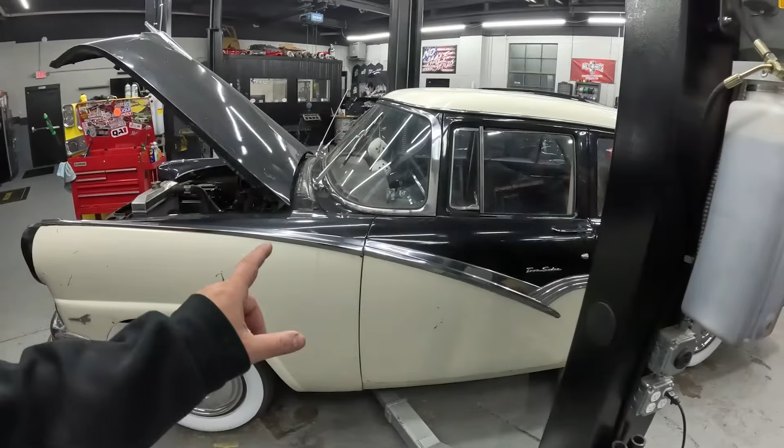So as I was saying outside in the cold, this is a 1956 Ford Fairlane. I believe it's Crown Victoria. It says Town Sedan. I saw a Victoria badge somewhere. I believe they had a 272, a 292, and a 312. What, 292 usually on the Y blocks? Yeah, this one is a 292. They also offered like a 312 for special edition or. This had a 292 in it as well when I got it. Oh yeah, so, with a 3-speed on the tree.

Yeah, you guys know that's Chris's '54 F100. So didn't I have like the same engine then? Didn't these both, pretty much the exact same thing? Oh, like look at these, they're like brother and sister. It's like we're a 50s Ford specialty shop. I know, switching up specialties. You guys will see more on Chris's truck, as I've said that in the last 25 videos.

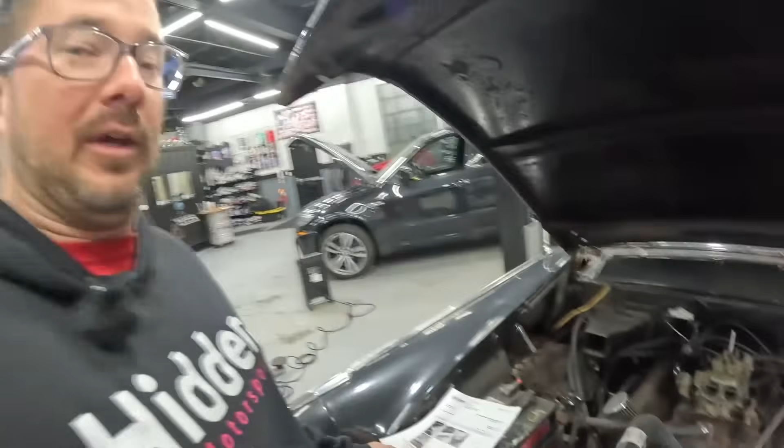We have a lot to do to this car. As we told you outside, we're giving it to my grandpa. He deserves it, he got me into these cars. He's always wanted one, so we're doing it. Vo and Chris is going to be helping on this project.

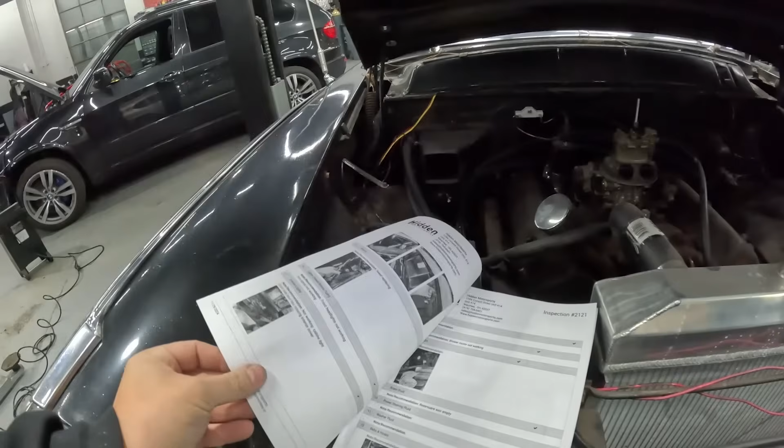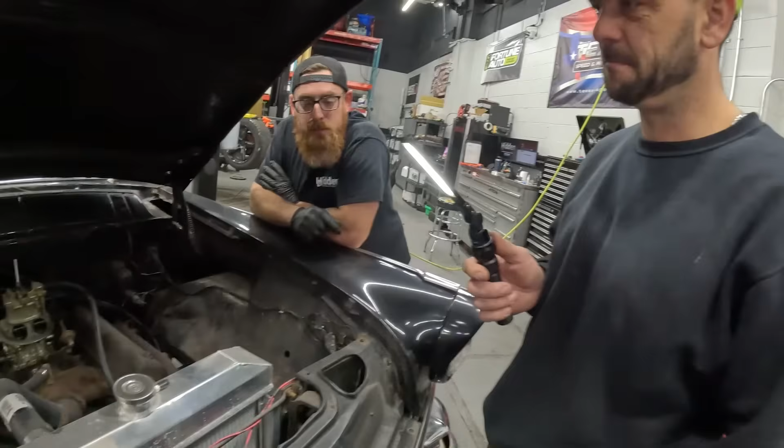What do we got going on? We actually did our full inspection on it like this was a customer car. We need wipers, lights, interior lights. There's no AC. Did the heater work? Probably not, no, heater didn't work. Engine oil was iffy, brake fluid not good. Belts and hoses, not good, because we had the upper radiator hose touching the exhaust. Oh yeah, this one, oh yeah, that's melting to it right now. Yeah, that's not good. Cabin filter, non-existent.

Spark plugs, really bad. Oh yeah, we had to re-gap them because they're basically closed tight when they should be like 70 thousandths or something huge on these. I think it was 65 or 70? 55, maybe 60, something like that. Gosh, so many. Not like .2 on these newer high power stuff we're doing. Battery is fairly new, but it's not charging, so we got a new alternator for that.

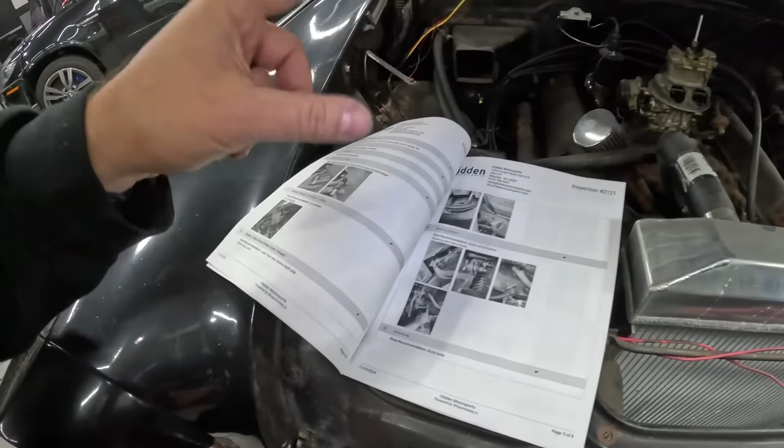All the brakes are leaking, right? Or was it all of them? Or all the drums. Yeah, they're all drums. Gotta go. Yep, drums are gone.

We are doing a front disc brake conversion. Brakes are almost non-existent. I almost crashed it going into the building the first time we pulled it in, and they're all leaking. Steering system also sucks. There's no power steering, it's all manual. And if it's hard for me to turn, I know it's going to be a little hard for my grandpa to turn. That's going out.

Yeah, it comes like a big old brake booster right here. Hopefully not too big, that'll go there. Then power steering, there's like brackets or something, that'll go here. We really don't know what we're doing, but we're going to do it as we go. These old cars are not our specialty.

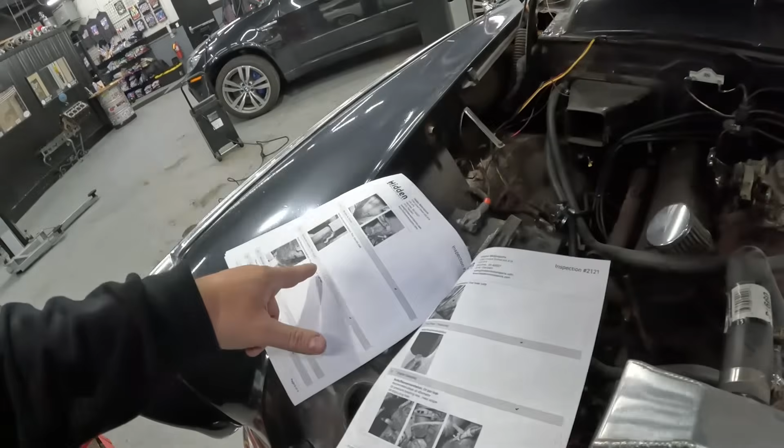What else we got? Oh yep, just getting all new shocks and struts. We're rebuilding the differential. The transmission's leaking, we're redoing that. Fuel lines are rusty and leaking, we're redoing those. Tires, okay.

We got the gaskets. It is pouring oil. Oh wait, oh that worries me. So when we did the inspection, it was pouring transmission oil and engine oil everywhere.

It's not pouring any oil. Does it have oil? But yeah, it was leaking from everywhere, like bad. Yeah, I did not think about that out there. I did not notice any transmission or engine oil. Well, I think we can just send it.

My hope is, I always told him, we talked about it, I was just like hey, if you got one of these, would you keep it stock and cruise it like back in the day? And he's like, hell no, we're going to put a big block and a blower in one if I ever get one. So I really want to hope that he wants to stay on that path. So we'll just get the engine running correctly so we can drive it around, do some things, and then swap it out for a big block and put a blower on it. That would be nasty. Yeah, that really would.

Also, Holley sent us a Sniper EFI 2 because I don't know carburetors and they suck. I am not a carburetor fan. Screw carburetors.

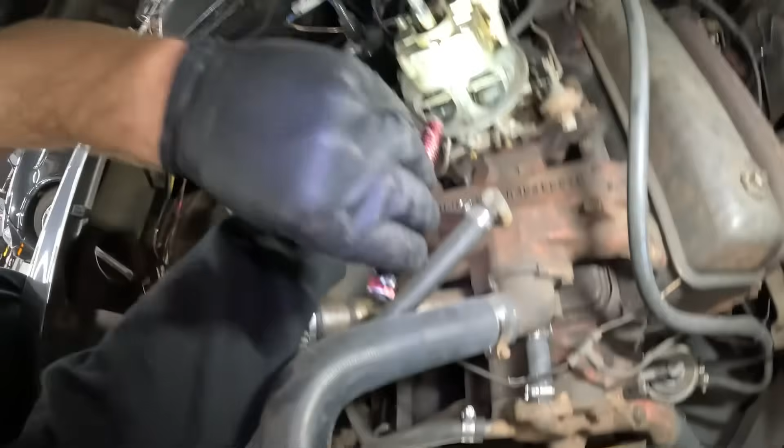My grandpa's probably going to be like, oh yeah, this is a something double barrel jump a Coke can thing. It's pretty sick though, because I think it is an old Holley 2-barrel, I believe. It is a Holley carburetor. Look at that, it is. But the inside is fairly decent.

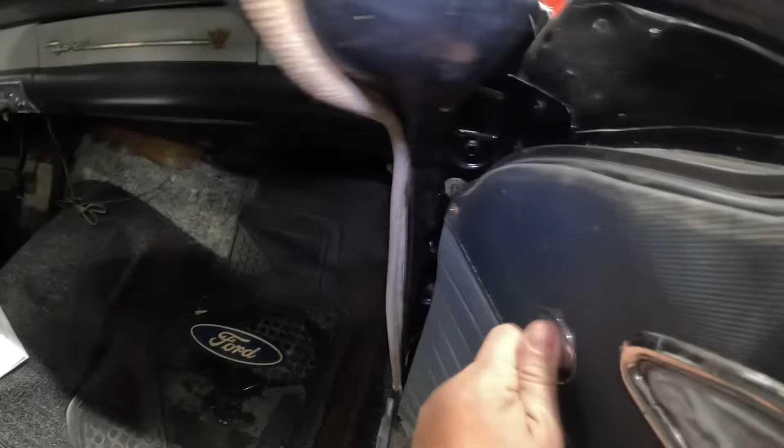We got, which looks like some Ford F-150 floor mats, and overall the interior is clean. It is missing a door panel over there. This one's a little chewed up, the window crank. Yep, no. Nope, crank's not working. That side doesn't have a crank.

That's a big back seat. Real big back seat, needs some love. Probably nice. Yeah, it's not. Oh no, not nice and secured. Okay.

Well, we got our work cut out for us. Yeah, we got lots of work. Work cut out for us. That's the word I wanted. I'll get some parts down. We'll get to it, and we'll be ready to start here right now.

It's a Monday morning, we got all parts laid out. All these boxes are packed full. But oh yeah, we got stuff back here too. This is all in the trunk. There's like new glass pieces. There's new, is that a transmission pan? Or oil pan? Yes, oh yeah.

Well, that's cool. We're gonna go and get started on all the boring stuff first. Probably oil pan, transmission pan, differential, and get to it. We gotta get this thing running this week, Chris. ASAP Rocky, buddy. ASAP. Let's get to it.

There it is. Oh my God, that is worse than I remember. Wow. It's kind of like everywhere. All right, that job should be here. Oh yeah, nope. Nope.

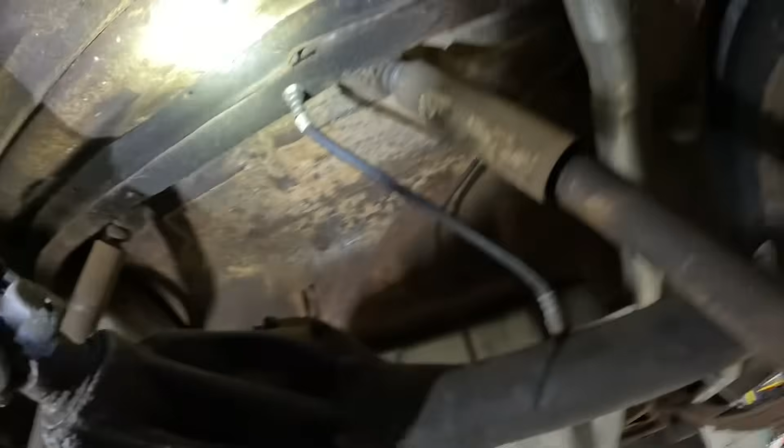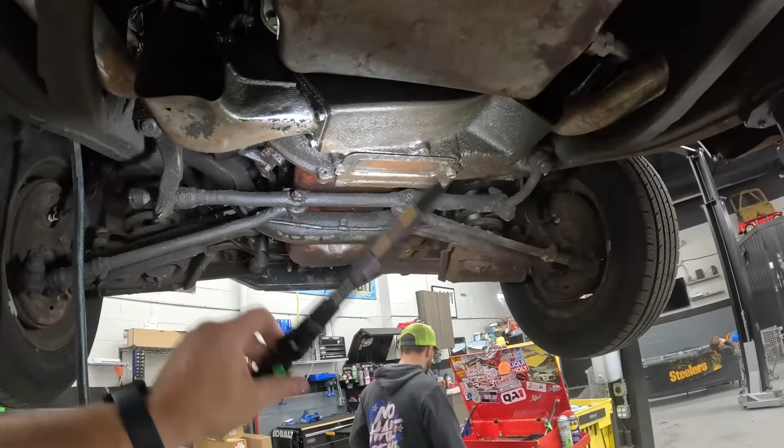As you can see right up here now guys, we got it all put back together with the new seals, with our new custom gasket setup. Custom gaskets, RTV, going up through here, pinion seal. It's all cleaned up, he's got the pan, everything going. We're gonna worry about that stuff in the future, possibly.

We are moving right along here. We are now going to work on the front end. So our friends over at MP Brakes hooked us up. When I was driving this thing around, I was pushing the brakes down to the floor, they were basically non-existent.

I was like, this is not safe whatsoever. Throw the drums in the trash.

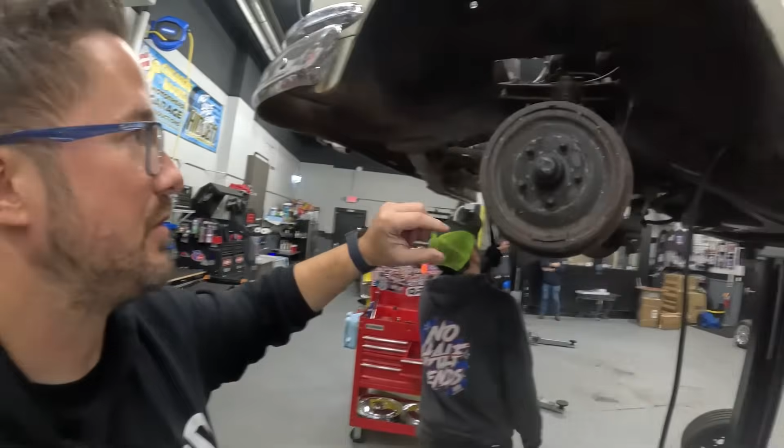Found online, MP Brakes makes a complete kit. It is literally everything you need: front rotors, calipers, pads, bracketry. They even throw in a brake booster setup, lines, literally everything you need. And they do it for so many vehicles to convert all of your old cars with front drums to modern age brake discs. So this is going to be really great.

While we're in here, we are going to try to replace all of these bushings. As you can see, they're blown. Everything is blown. Is there anything good left on this car?

Tires. I worked on this side over here. We got the brackets in, the bearings, all this. I've never actually worked on these, and I got it kind of too tight.

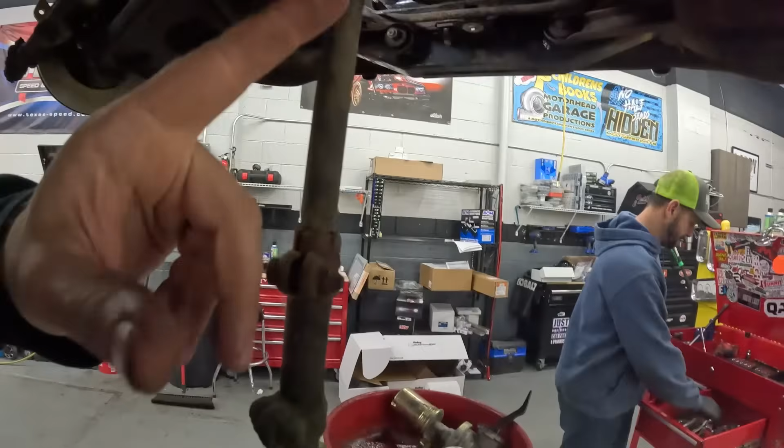Too tight, Vo says. We'll loosen it up. Quarter turn back, but it does take some pressure. He's working on the other side over here. I got new steering pieces for all this that showed up.

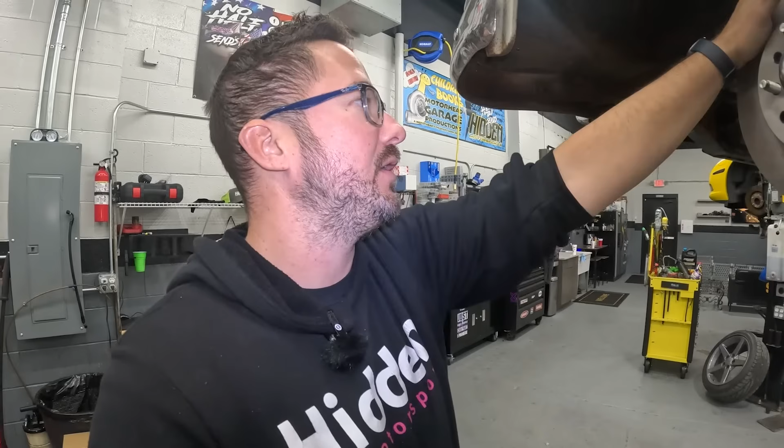It might be day 4, but there is a lot of progress being made. Vo actually has been doing the majority of the work because we're working on it during the day as well. And I got to do all the estimates, all the office work, everything to do with that.

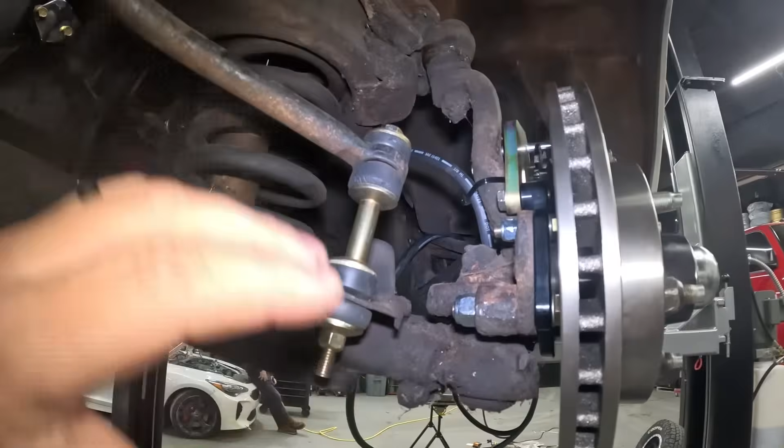But he's got these sway bar bushings in, end links, working on control arm bushings. You can see caliper is in there, all new bearings. It spins. I noticed idler arm was bad, so we got a new one in. There's no play in it. It's going along pretty well.

So here is where we're going to be working on next. I need to get this brake master cylinder out right here, and then I can get down to the steering gearbox down here. And apparently there's a bunch of custom work you got to do, or at least cutting down the steering shaft and things like that. So this is going to be a fun project.

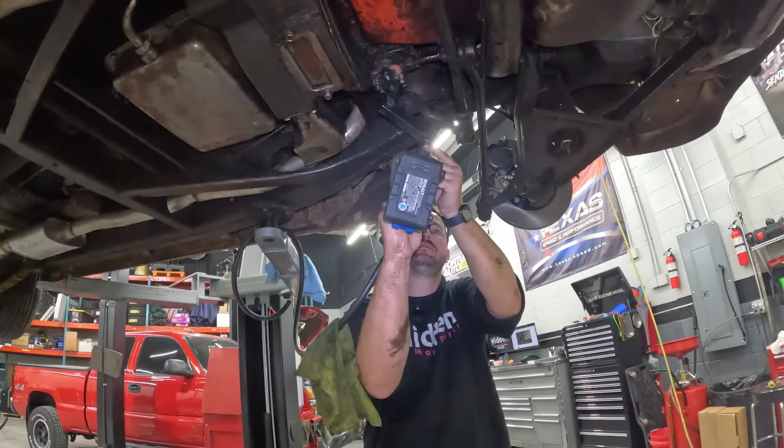Yeah, so I guess I just put this in and ugga it away.

Hey, I did a thing. Woo! I'm so happy. Mother... I'm not so happy anymore. Yep, oil.

So, after that short intermission where we did not yell any cuss words at all, we're good boys, we're good boys.

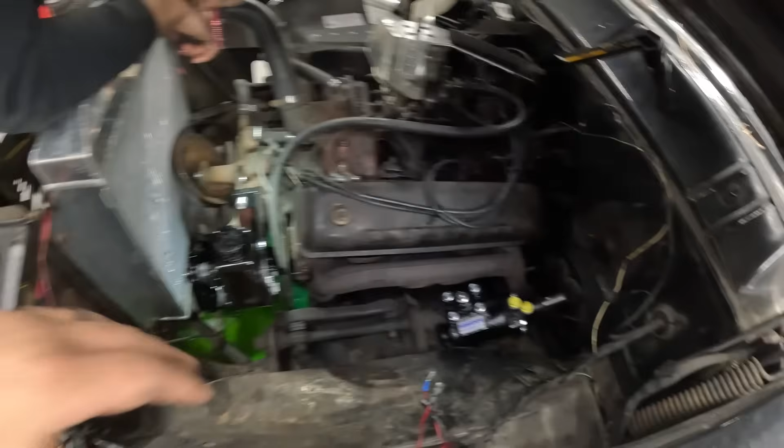We got it out, the steering rack. It's completely out, and then we mounted up the new power steering pump right here. Steering gearbox. Right there is where the power steering lines will go. It is very close to this header. I might wrap it, might send it because we might change it, but I also ordered new engine mounts because I noticed it was sagging a little bit and I could fix it with new engine mounts.

It's got that going. Chris has got the pump right up here, and now we've made the decision to just change the water pump too. Over there, we're gonna need a little modification because the pump, if you can see, it doesn't sit straight on the bracket. Oh, sure doesn't. So the pulley's way off.

We're cocked at an angle here, so we're gonna have to do a little bit of grinding on that, cutting away a little bit. Oh, phone's ringing.

There's another little problem we ran into: the steering wheel. Now, if you see, try to set this up. So I will put the shaft on top of the pump where it goes, and you can see the steering wheel.

That goes there, this goes right here. Now we're driving grandma style down the road.

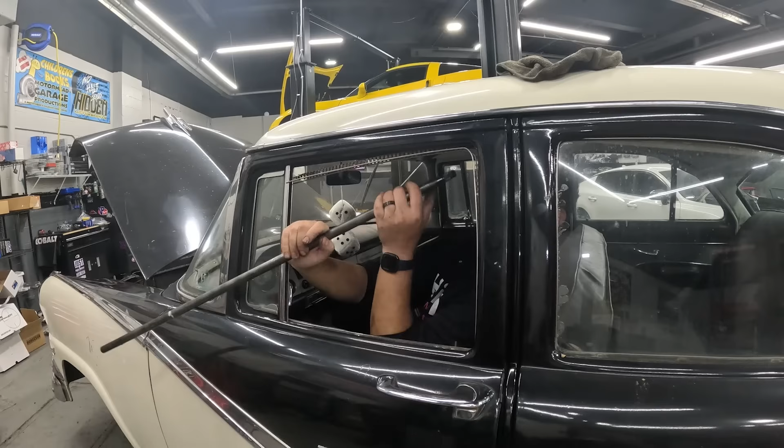So I need to cut some inches off of that. Took me a little mark already. So that's a lot that needs to get cut off. I say a foot, close to a foot. That much, Chris? That's a lot.

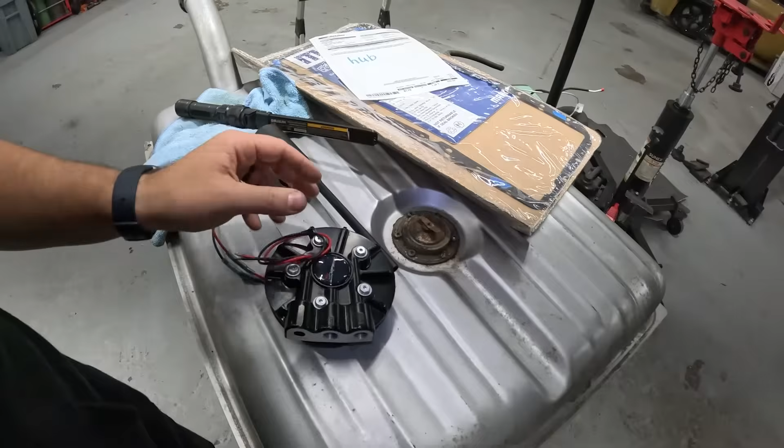So here's the fuel pump setup right here. We cut this out right in our fuel tank. We're gonna put it right here, flatten it down. Comes with all this stuff to hopefully get it a nice, great seal. Comes with all new lines. Then it's going to come with our fuel pump and filter.

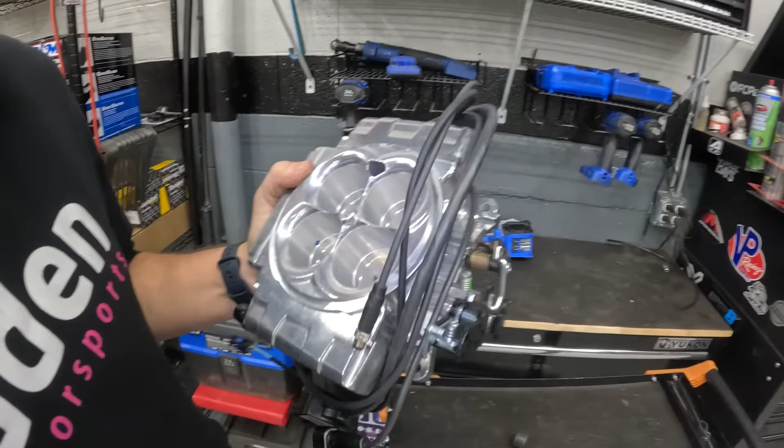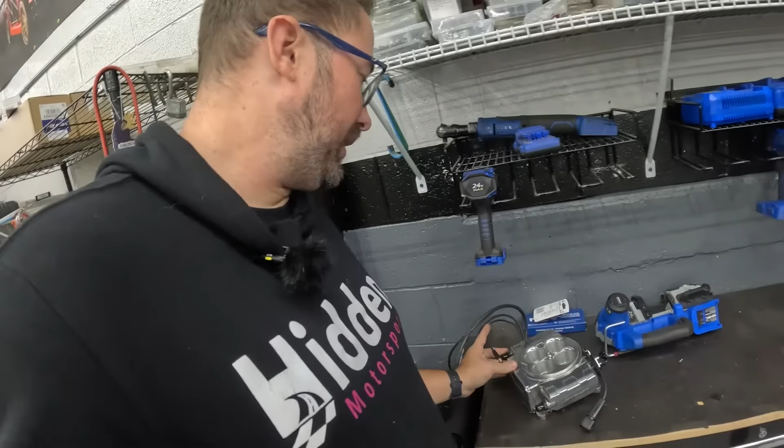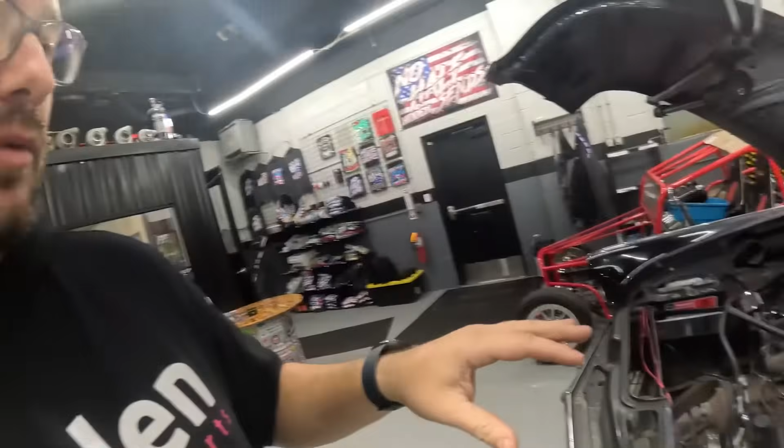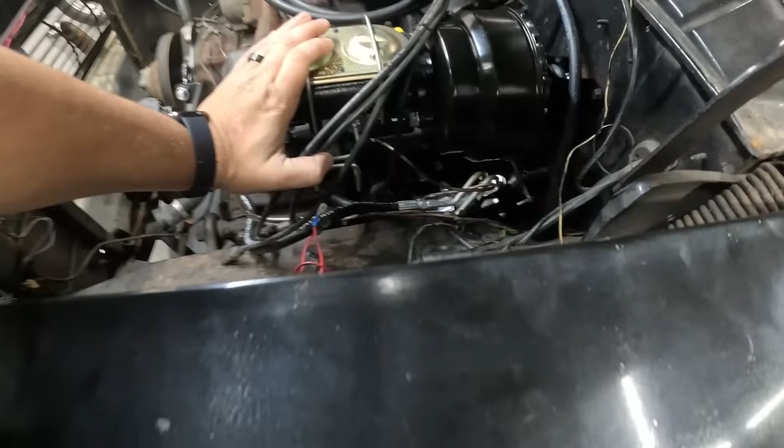I got 3 days to finish this car. You saw we got the brakes done, all new brake lines are in, fuel tank's in. We put in the fuel pump for our sniper. The power steering is done. Had to get a new steering wheel because the old one was crumbling. That was real fun, we had to custom make a steering shaft. See up here, it looks really pretty. We got the new brake booster setup right here, the new power steering setup down here, this new pump. This is just sitting here because we need a few more bolts, but that'll be fine.

Now, this is something I always recommend to everyone to get if you have a carburetor. If you know me, you know I hate carburetors. I just do, don't like them at all. But I understand they were good back in their time. I like fuel injection for everything. So with this Holley Sniper system, you see it basically looks like a carburetor.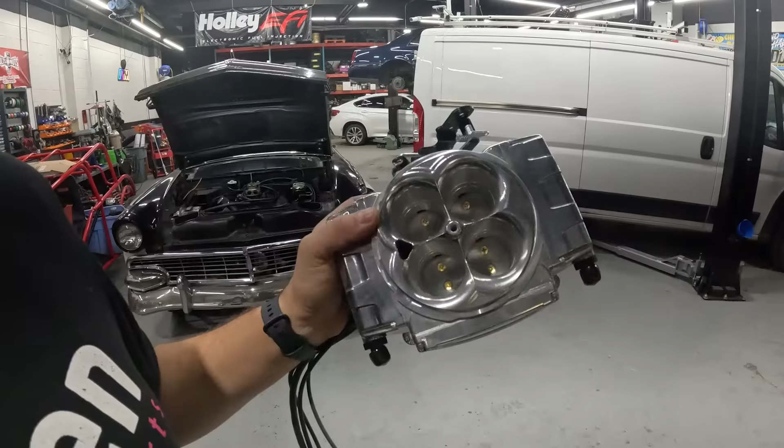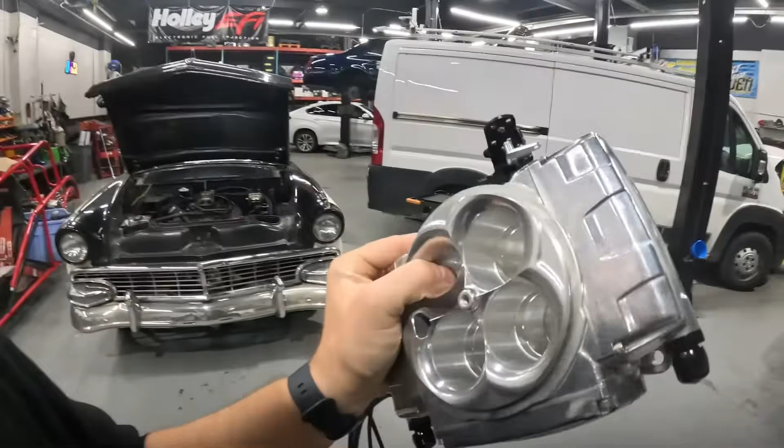It'll trick you, but can't really see. On the inside of these is little computers, or no, right here's the computer to control it all. And inside is fuel injectors, four of them to be precise. And you really just take off your old one, bolt on this one. We got some wiring, and you have a real fuel pump. Other than that, you don't need much else. And it has, you see, an idle air control valve, TPS sensor, everything. So you can have cold starts, that'll be fine. You don't gotta pump the gas, you don't gotta do anything. It'll drive like a modern car.

I've probably installed 5 of these this year for customer cars. And every single time a customer is like, oh my gosh, did you put a cam or something in it? It's so fast now, it's crazy. I'm like, no, welcome to the modern age. It's literally, guys, I'm not even joking, you'll bolt on 50 horsepower and get amazing gas mileage by using these Holley Sniper EFI systems.

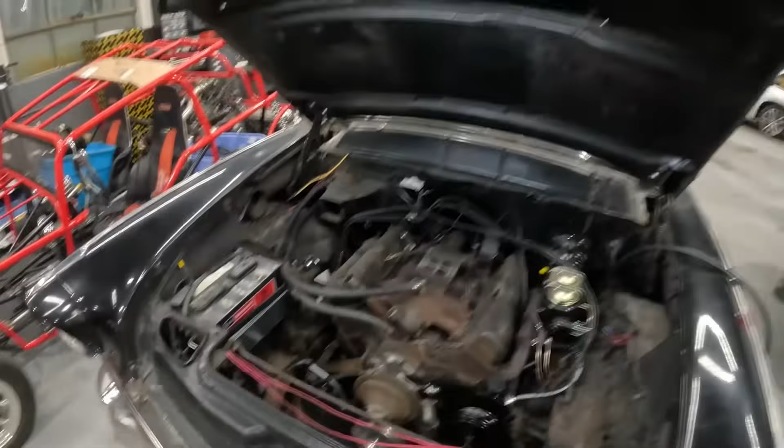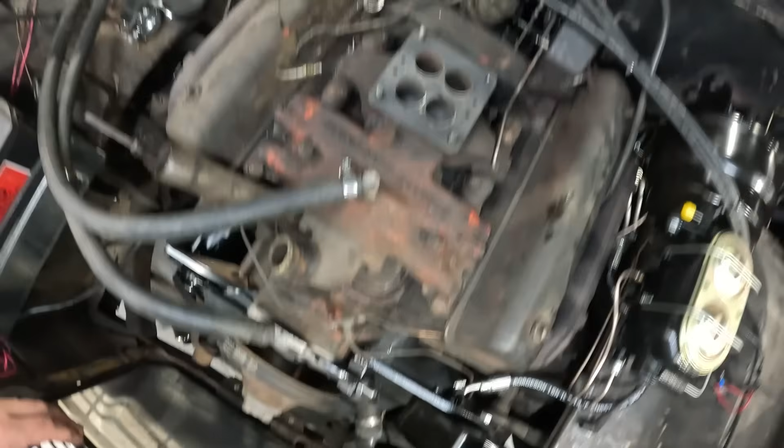All right, we got this carburetor off. These are just little tiny ports. It looks like, I don't even know, down there. Very strange, I am completely new to this style. I haven't done one on an old Ford, it's been like small block Chevys. Believe that's the vacuum thing for advancing timing. I gotta see if I delete that or what do I do, because most of the ones I get already have like a Hyper Spark on them or CD box or something like that. This one's just there, doesn't got much.

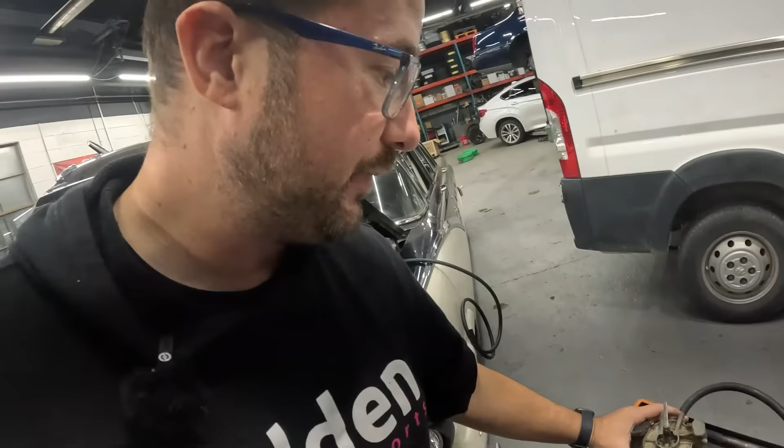But I found something really cool. So this old carburetor, thought was stock, might not be stock, but look at that. That is a Holley carburetor right there, made in Detroit, Michigan. And it's got a whole lot of patents to it. But yeah, that's really cool. I mean, we're taking off a Holley and putting on a Holley.

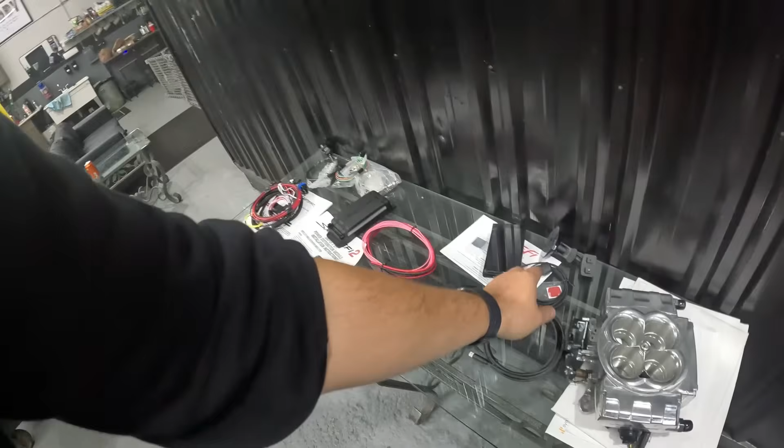Laid out everything right here. Wires, they come with a PDM box. This is, I guess, kind of like a solid state relay a little bit. You can hook up all your fans, fuel pumps, everything to it, and then just plug it into the sniper, and it controls everything, it's really great. And this is actually the first one, it came with a 5-inch touchscreen. Really sweet, so we'll mount that somewhere cool. Monitor your gauges, temps, and it came with this, a GPS speed sensor, so we can have a speedometer.

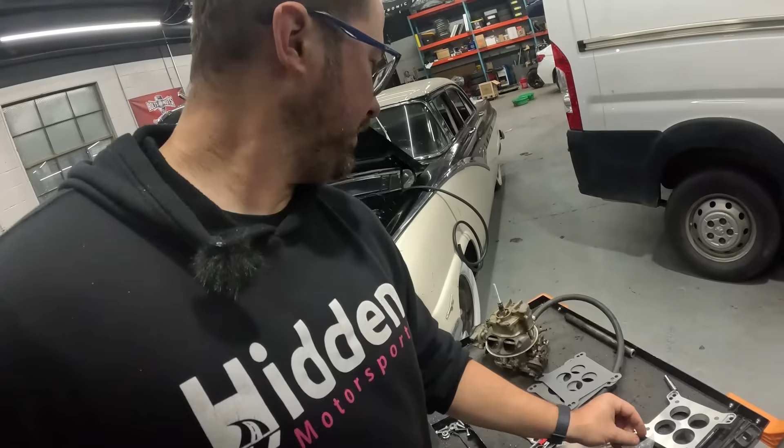Oh yeah, coolant temp sensor, we got to get that wired in. Ooh yeah, need to drill a hole for an O2 sensor, gotta have that. So much fun. And I didn't know if the sniper will bolt up to it correctly, so I did get an adapter plate, which is things and stuff.

It does, well, yeah. Things and stuff. Yeah, I'll figure it out.

It's all wired up. Honestly, about to have lunchtime. I was like, you know what, I'll do a little bit of wiring real quick and then catch the rest of you guys up.

45 minutes, if that, to completely wire this Sniper 2 system. Let me show you guys.

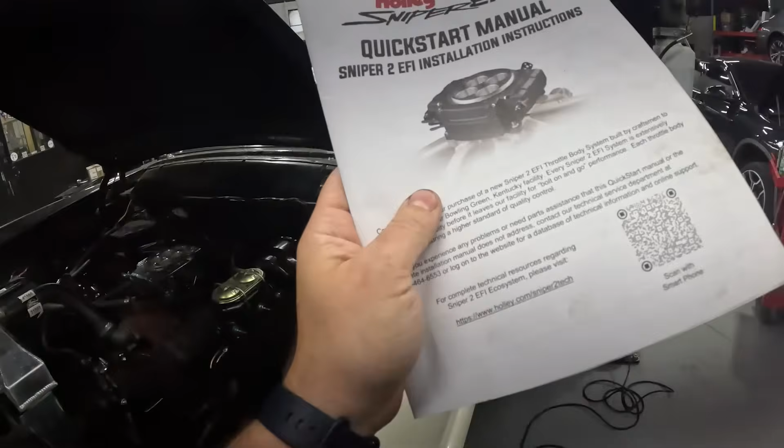Sorry, excuse the mess. Right there, the Holley Sniper 2. This thing is absolutely amazing. So coming out of the carb, well, it looks like a carb, but it's not.

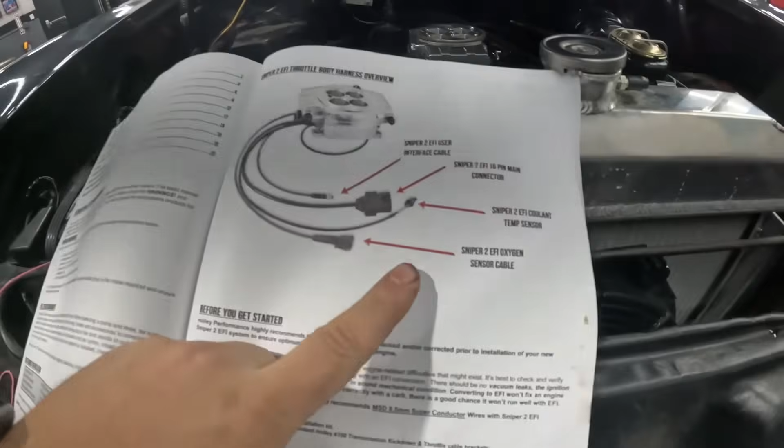You just got these four little plugs right here. That is it. Then you hook up two lines for your fuel system.

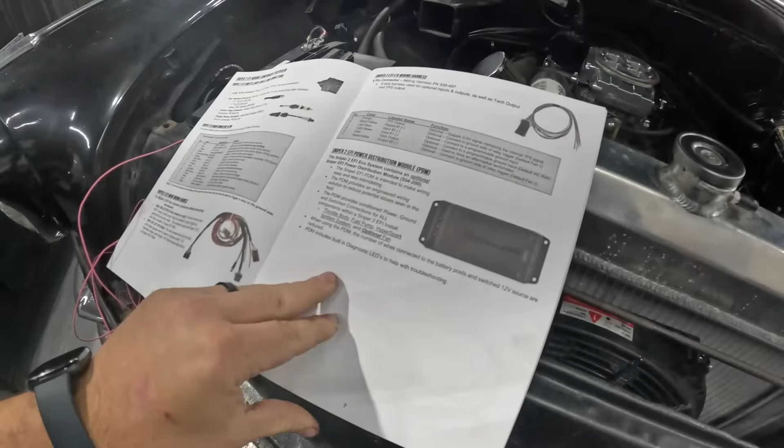You hook up an O2 sensor, and then there are some loose wires. Holley made this thing called a PDM that is freaking amazing.

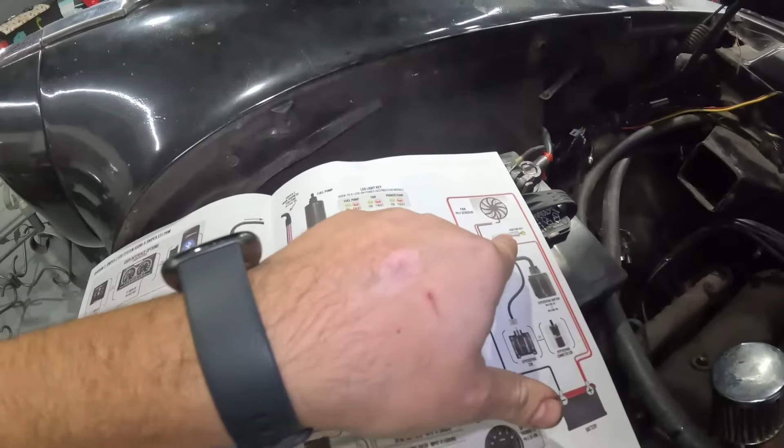This right here, let me turn on some lights. This PDM right here, you hook up battery positive and negative to it, which I got right down in here. Once you hook that up, put your key on for your ignition, then you run your fuel pump to it.

You run, if you have an electric fan, points and all that stuff to it, and a CDI box. You plug all that in and you're completely done.

Like, look at this. All you did was bolt that on, fuel hose, throttle right here, which I gotta clean up a little bit. It moves. Coming around down here, you can see those are the wires. They're real easy to just plug right in.

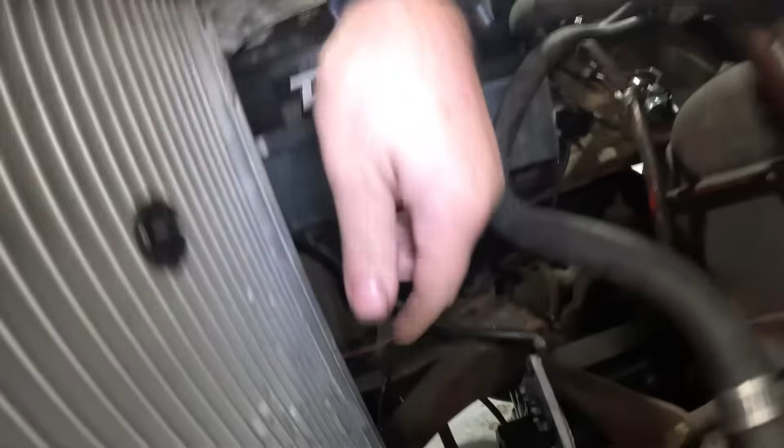I do have one wire left. This one right here is my key on, which I gotta figure out. I have no idea where the key on power is. These cars had almost no power and no electronics in them. So I have that left to do.

We did the O2 sensor, and you saw we got the water pump hooked up. My belts came in today, so we got water pump, power steering, and the coolant. I have all the fluids in it.

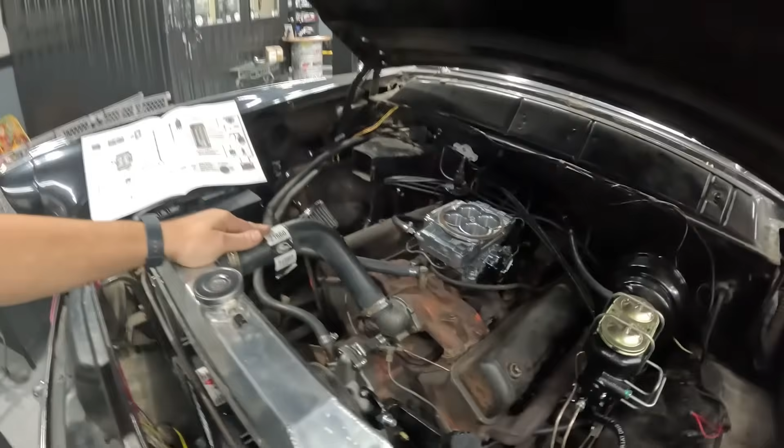So I really think I just have to find key on power, put some gas in it, and write a tune, which through the Holley handheld will help you if you don't do tuning a lot.

It's called the Wizard. You literally just type in your engine cubic inches, which fuel you're running, answer a few questions, and it'll write the tune for you. It should be able to start up on it, and then it'll self-learn right after that. It's a pretty awesome system.

So right now I'm gonna turn the key on and start testing stuff. Maybe the starter solenoid has got some key on power, or something's got key on power. I don't know what yet, but I'm gonna figure it out.

So I believe we are hooked up. I have fluids, and I found a 12-volt key on. That's something I taped up, but right back here, and ran it.

Do I know what that wire is? No. Do I know what it goes to? Also no. But there were some wires laying around floppy, and I was testing them, and that one's off with the key off and on with the key on.

So hopefully it's key on while cranking. Didn't test that. We do need key on while cranking, but whatever.

Let's try to fire this up. But before I do that, I need to tune the Sniper.

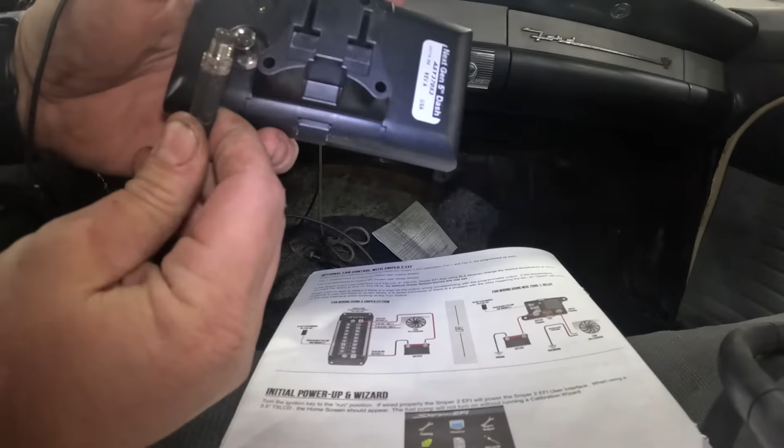Okay, so I ran the serial cable into the car already, and it looks like all we do is just plug it in. All this is new to me too. We're doing it together for our first time.

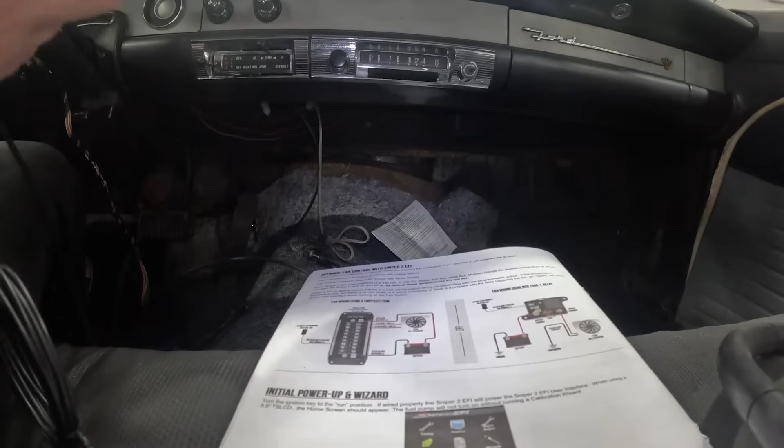Okay, that's in. This right here, so you know that 12-volt trigger I was telling you about? When nothing's hooked up and I'm just touching the wire, it's like 12.1 volts. It's great. But the screen flashing and turning off, in my experience, means low voltage.

So I go over here and test it, and it's reading like 9.2 volts at the trigger. I unplug the screen, it's going back up to 12. So something's telling me that this 12-volt key on trigger, super weak wire, is corroded, or it can't handle the power of the screen.

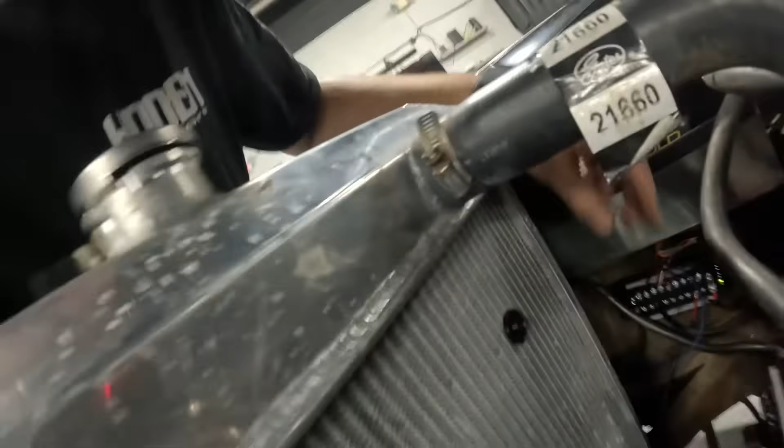So just to get some running going, I just jumped it to permanent power on. I'm gonna worry about the key on later, but I really want to get this thing started. So now we can continue again.

What the heck? I just went psh at my face. Okay. Ignition is cycled.

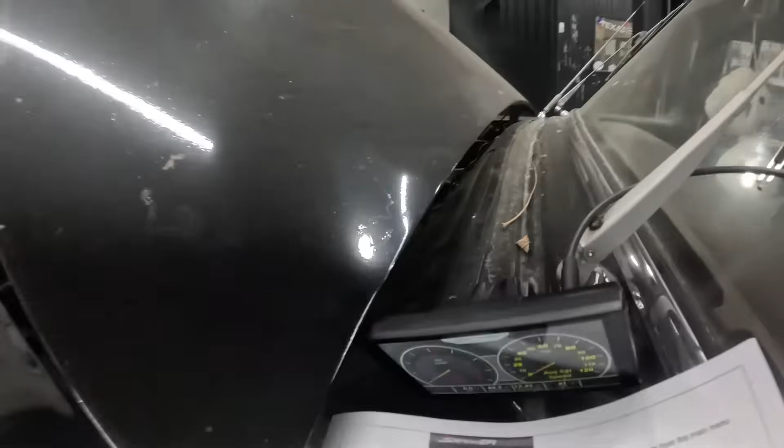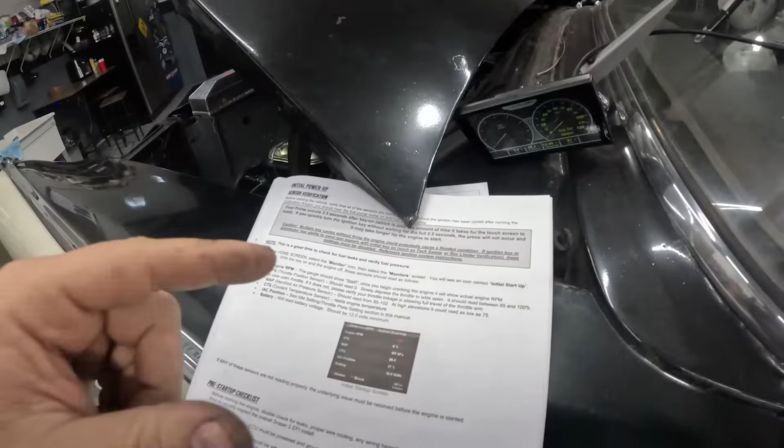Here we go, sensor verification, prime, fuel pump prime does occur, because I was hearing that. This is a great time to check for fuel leaks.

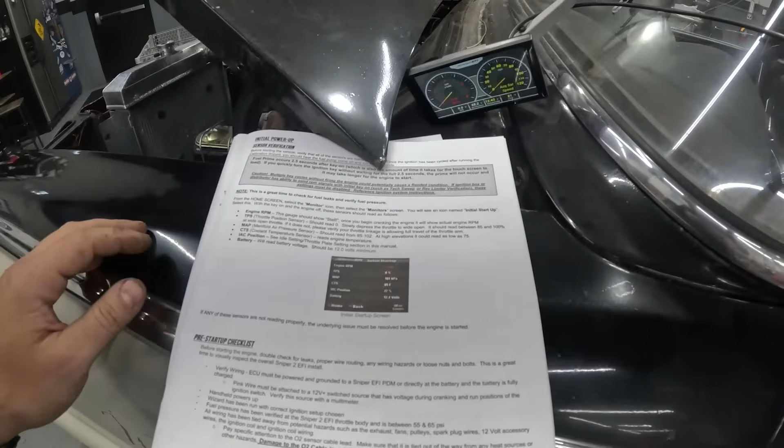Yeah, sure, I'm gonna say no fuel leaks. Pre-startup, yep, verifying ECU. Yep, all wires are tied up, enough.

Startup on the handheld is saying ignition start, crank the engine and look at the RPM thing. Okay, let me get this set up somewhere I can see it and crank it at the same time. There we go.

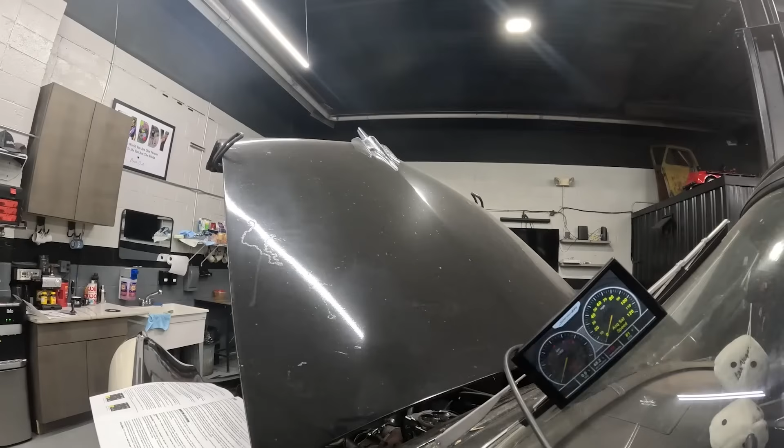No. Oh yeah, the key's over here. Yeah.

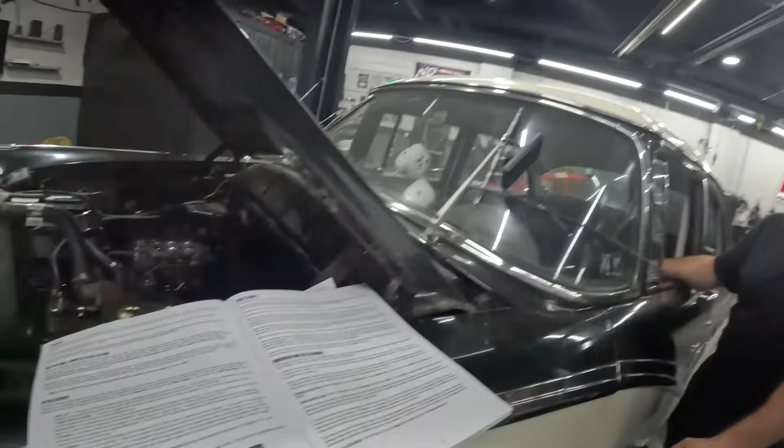We have no RPM at all. That needle's not moving at all. Well, that's an issue, I would jump back and risk it too. You're dropping well below 12 with a brand new battery.

Probably has something to do with it. Select your ignition type - yeah, I did coil, negative, no timing control. Isn't there a wire that's supposed to go to the coil on these? I'm not sure, sir. Outputs, outputs.

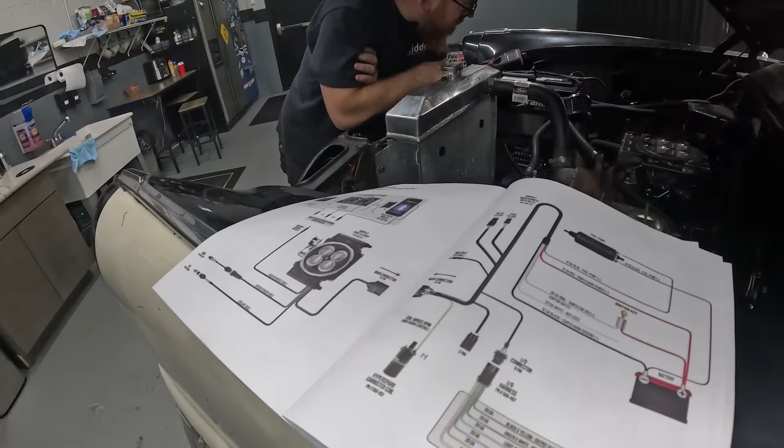Oh, look, there's a green light down here. You know what? Wonder, that yellow wire doesn't look familiar.

If my calculations are correct, it's right here, bundled. Let me guess, does that go to the coil? It goes to the negative, sure it does, on the coil, which would be that side right there. Does that go to the positive side or to the speaker wire side?

I hate it. You know what, Chris? I'm gonna do that. Hit the starter. Let's see if this does things now. I'm just gonna hold it.

Hey, it's turning faster now. Yes. Okay, give her a start.

It wants to do things. Yeah!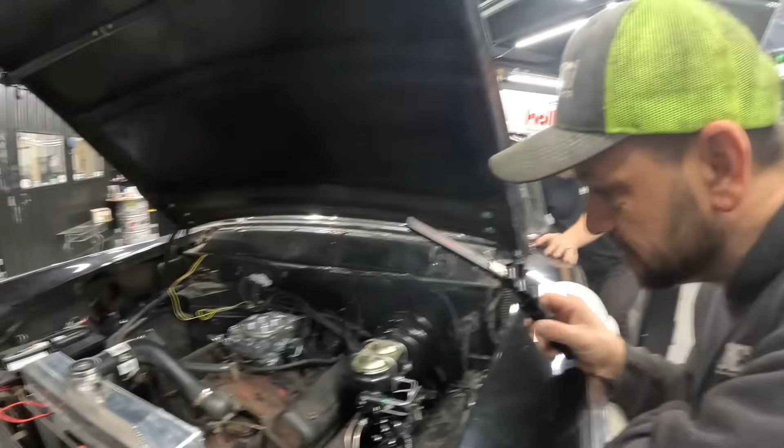It's running! Yeah! Woo! Oh, I gotta record it. Dude, it's actually running so well, that wizard. Let's go! Woo! Yeah!

Little backfire. Okay. Calm down there. My boy Cleetus McFarland would put it straight on the chip.

Are you connected this wire? No, I'm not sure actually. Because it's working. Yeah, I don't know if I really. Those wires were just laying right there. The same, because... Huh. From where?

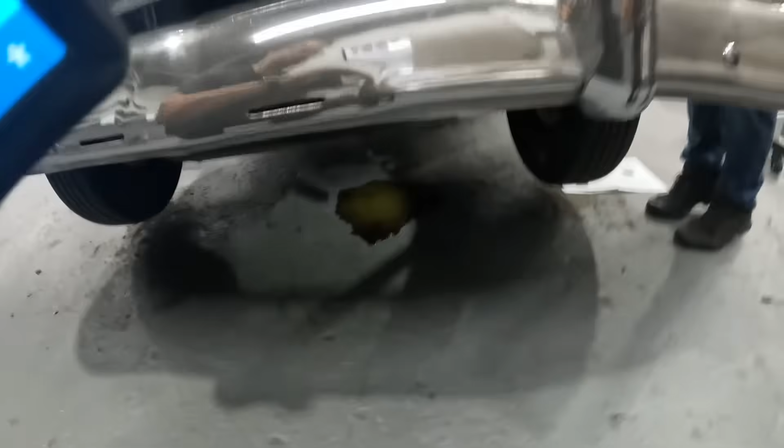That's a problem. Yep, yep, yep. Where's this leak? Yep.

Well, that thing is working, but it's leaking lots of oil, so now we'll have to pull off a valve cover and just JB weld it shut. So, do we take off the homemade top end oiling kit while we're at it? God, I hate that oiling kit.

Honestly, that might have a crack in it. It might be why it's... Yep, that's exactly what it is, that is why it is all over the floor. Okay, we need some kitty litter picker upper.

That's running, it's smoking, but it is running. I did a thing, I installed the sniper. You guys, that is how great Holley is, Chris.

Start it up. I was about to say some things that would have gotten us killed. It's so easy, a caveman could do it. That's not what I was going to say. Oh, yeah.

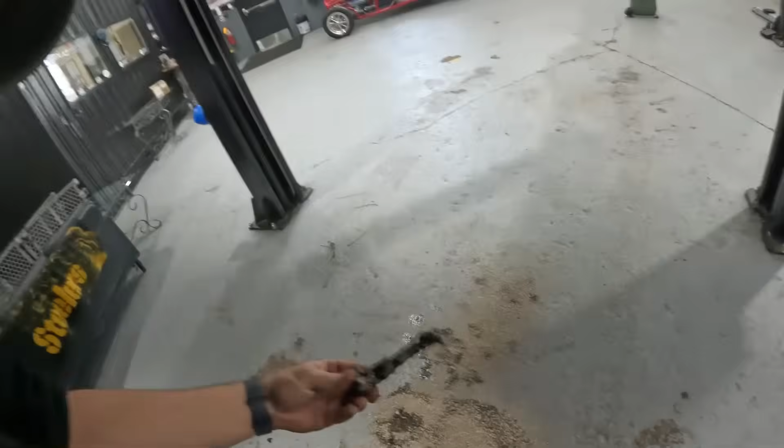Well, I found the leakage. So, this little thing had a T in it, right here, and that's what was supplying oil to the top part of the heads. I went to just wiggle it, thinking it was loose. No, as you can see right there, she was just broken.

Awesome. So now I'm going to try and extract the broken thread out of there. And if we can't extract the broken thread out of there, we gonna weld it shut or something like that, cause we gotta give this car back to him like tomorrow. Let's see what I got in here.

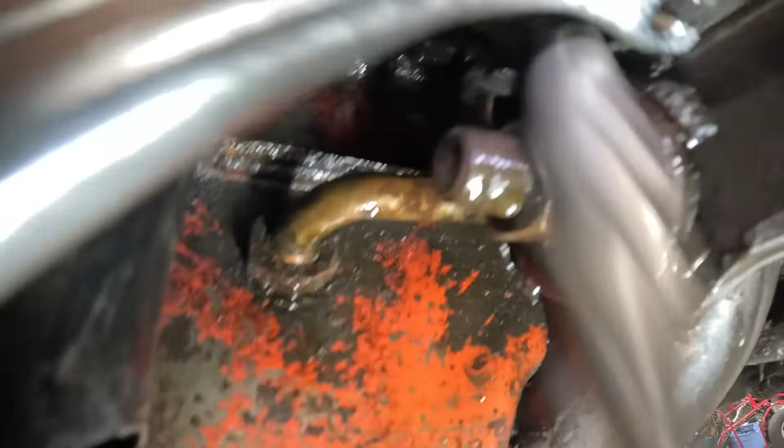Okay, please stay. Hey, it's turning. Aww. We are getting there, I believe the engine bay area is all done.

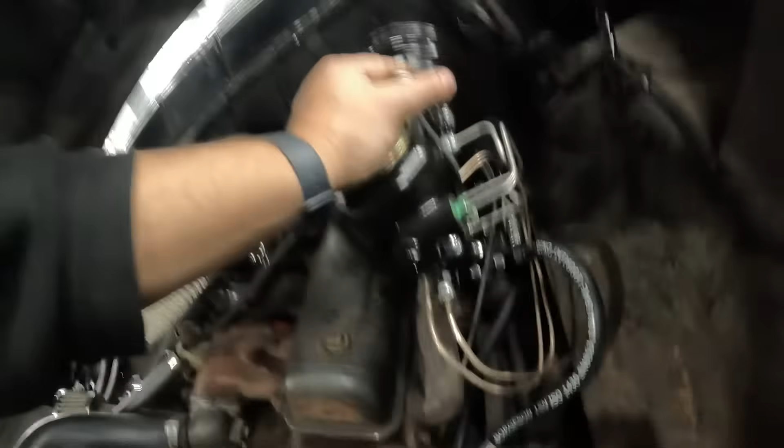Here is what she looks like. So we got electric fan conversion, new radiator, new water pump, new thermostat, power steering conversion, the pulleys for that, the Holley Sniper 2 that is under there, you can't tell, with Edelbrock hat that I found in the trunk area. Oh, we got new batteries, MSD relay, PDM from Holley, all the wiring going around, new plugs, new wires, front disc brake conversion with brake booster setup, power steering pump, block offs.

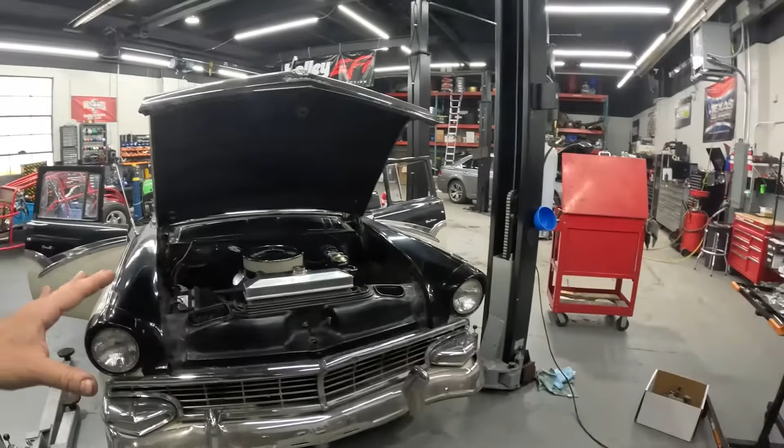I think that's everything. We do have the Holley retrofit LED lights for the front, they kind of look factory, but they're LED, sitting over there. If we have time, I will get them put in, but we have 1 day until Christmas, so I got more important things to do right now.

I just noticed the headlights don't work at all, and it's getting close to 5, which means it's almost dark. Car needs some gas in it, it needs a test drive. So we're gonna go for a drive right now.

And then if it's all good and it makes it, we will get it back in, do the headlights, finish up everything, probably give it a bath, or maybe, I don't know, gel coat. I don't know what's on these old things. Let's see how it does.

All right, one thing I don't like, no seatbelts. Yeah, and normally I'd have my laptop out tuning, but you need a special cord to go from the Sniper to the laptop, and I've never had it, but it's on order.

Windshield wipers are going off now.

I don't know, are they going? I don't know anything. Sketchy.

Oh my, we did it. They ain't the regular brakes. No, we got rid of the drum brakes and put in actual disc brakes that are now power brakes. We adapted power steering to it as well. And then we have the Holley Sniper, which looks like a carburetor, but it's fuel injection.

Oh my, new water pump, watch your fingers. New control arms, new suspension, new battery, new radiator, new everything.

And that 292 cubic inch engine. We got you, Daddy, huh? It's a little rough, running on 7 cylinders right now. Should be a wire. I haven't really looked it up too much yet because it just started acting up last night.

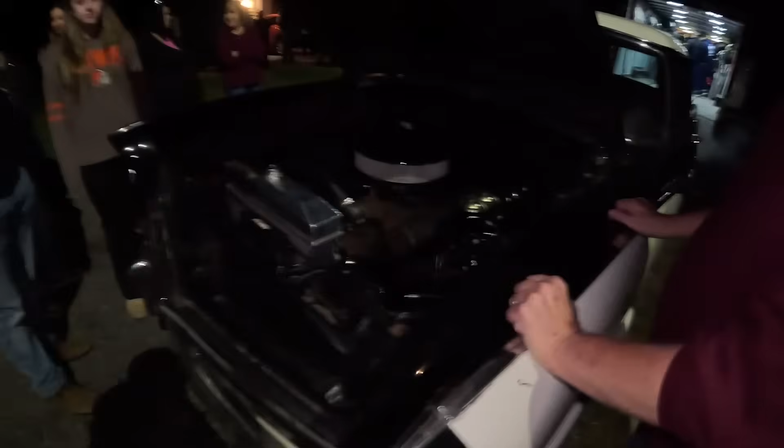All new brake lines, everything's new. If I put a bigger engine in, I want to put a blower, a big block, turbo 400. But this is the 292. I've had many of these, and it's working. I think it's making a whopping 100 horsepower right now.

We'll go ahead and sit in it, see what you think. Don't start making out in the back seat. Yeah, it is a big back seat. Oh, you can do it in the front seat here. Oh, the lights are dying. There you go. Oh, the horn button, for some reason, is down here.

Radio? Yeah, I didn't actually concentrate on any of that yet, because we've only had it for 3 months working on it. Don't worry about that, I'll get those figured out.

Turn it over here. Yeah, that doesn't work either. Turn the wheel. Yep, modern power steering. I had to put a new steering wheel on because I had to cut the steering column down and pull this apart.